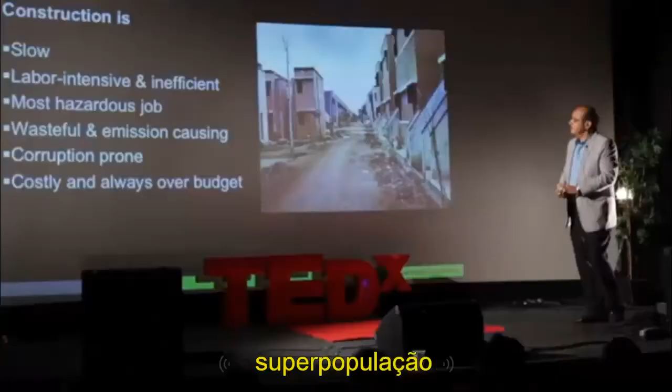illiteracy, and overpopulation. Naturally, governments are after a solution. They are after finding ways to change the situation. However, what they're facing is a problem of conventional construction, the current construction methods that we employ. They are generally slow, labor intensive, and inefficient.

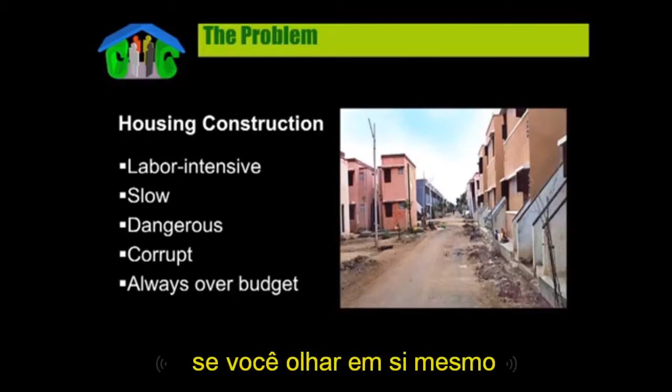If you look around yourself, pretty much everything is made automatically today. Your shoes, your clothes, your home appliances, your car. The only thing we still build by hand are these buildings.

Construction is the most hazardous job. It is more dangerous than mining and agriculture. In this country, it kills 10,000 people every year, and there are about 400,000 injuries every year. Eventually, these translate into cost to the society and homeowners.

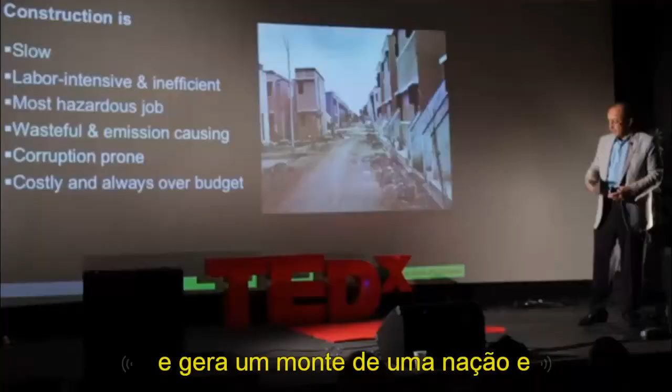Construction, the way it's done today, is very wasteful and generates a lot of emission. And because of all the different trades that are involved and the difficulty of the management process in construction, the process is pretty corruption prone. It is very costly and is always over budget.

So what we have been focusing on is finding a solution to this problem. And our solution basically benefits from advanced technology.

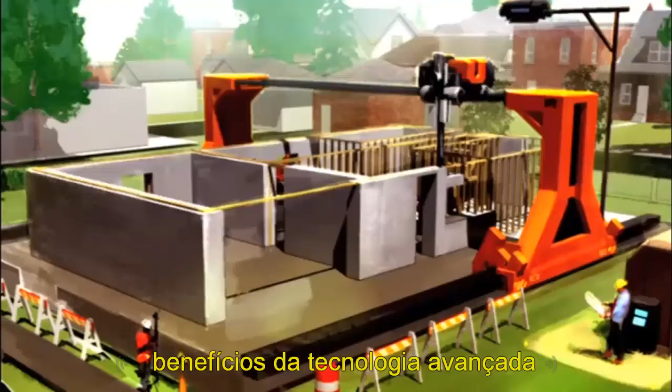I named this process contour crafting, and it is essentially a way of streamlining the process of construction by benefiting from the experience that we have gained in the domain of manufacturing. In manufacturing, there's a process called CAD/CAM, computer-aided design, computer-aided manufacturing.

A lot of things that you see are designed on computer and, without any human interference, are sent to the production machinery that automatically make those products that you use. So we want to scale up those processes and bring them to the realm of construction.

This, of course, has been the desire of a lot of engineers and technologists. There have been problems and difficulties in such a transition. Recently, there has been development in the field of fabrication. You probably heard about 3D printing of 3D objects. So contour crafting is basically scaling up 3D printing to the scale of buildings.

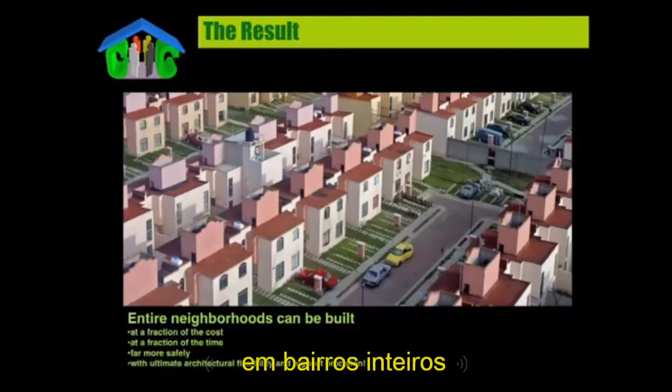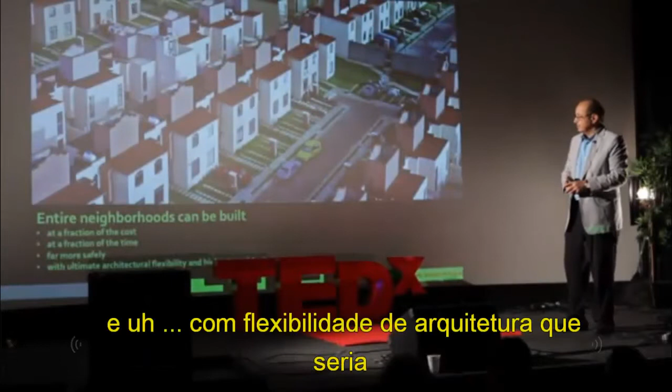What we are hoping to generate are entire neighborhoods that are dignified at a fraction of the cost, at a fraction of the time, far more safely, and with architectural flexibility that would be unprecedented.

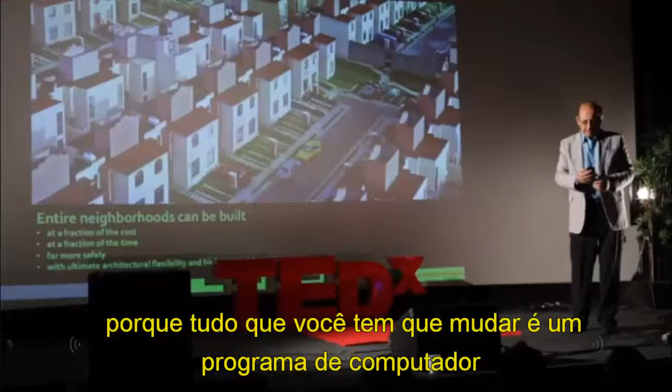So the buildings that will be built, of course, will not be as homogeneous as these. Every building can be very different. They do not have to look like tract houses because all you have to change is a computer program. The architectural design is basically sent to the machine directly.

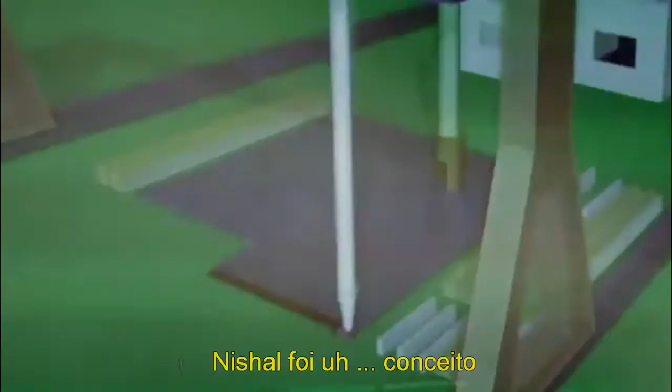This animation shows the concept. The material, which is cementitious material, initially concrete, is deposited through a nozzle, and the building is built layer by layer. In the process, a lot of things can be done, including automatic reinforcement, automatic plumbing, and automatic electrical network installation.

Once the basic structure is done, there could be other automated processes that would do auxiliary operations such as finish work, tiling, and even painting using inkjet printers, the kind that print billboards. So in the end, the whole building can be ready in an unprecedented time. We anticipate that an average house, like a 2,500 square foot house, can be built in about 20 hours, custom designed.

The model that you see here is pretty simplified because I didn't want to make the animation difficult for my students. But you can imagine that the walls do not have to necessarily be rectilinear. They can use any kind of curve. Therefore, you can really execute very exotic, beautiful architectural features without incurring additional cost.

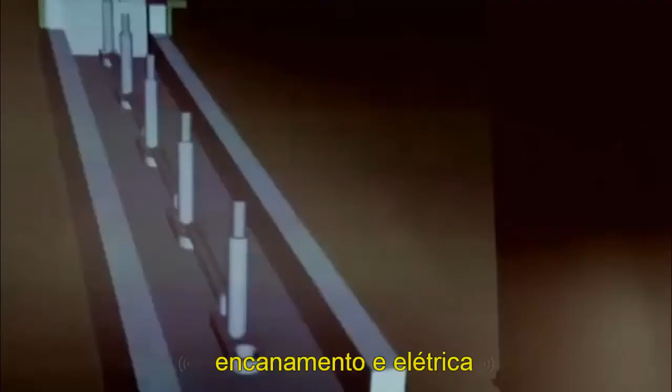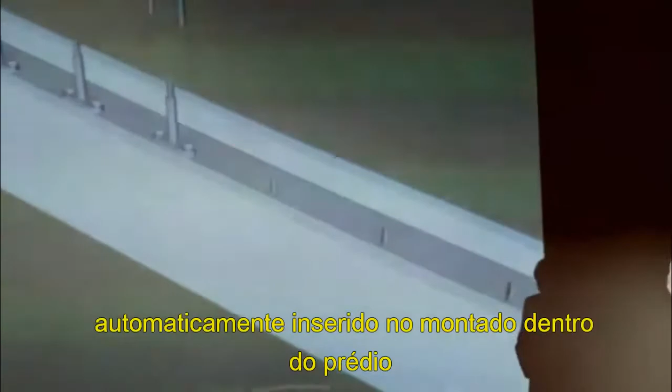These clips show how reinforcement, plumbing, and electrical installation can be done. So rather than using continuous rebars, we can have segments of rebar automatically inserted and assembled inside the building. This wall is being reinforced by a two-dimensional mesh of steel. Likewise, plumbing elements could be installed while the building is being erected.

As you know, currently every one of these activities involves its own trade. So for electrical network installations, you can have these polymeric blocks with conductors that carry electricity and communication signals.

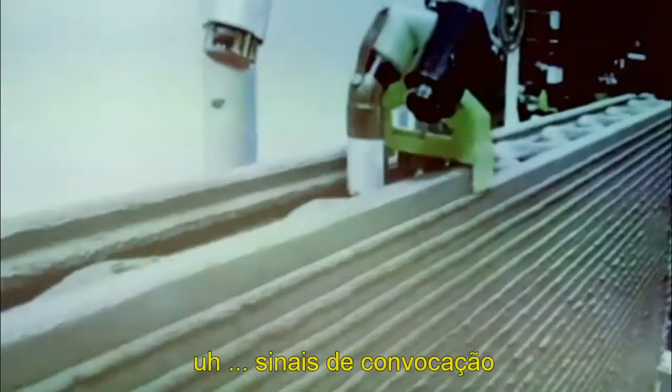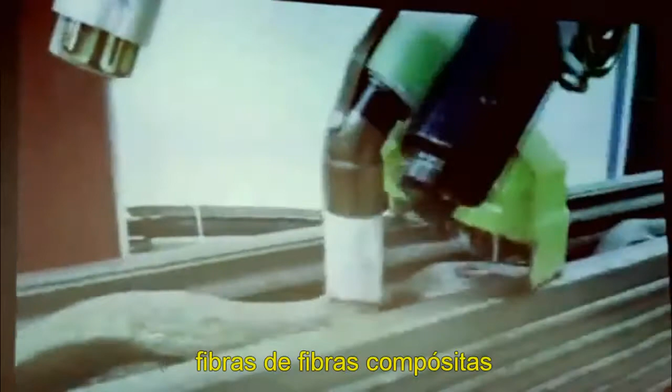Well, this is one of the machines that we've developed. As you see, the nozzle is extruding pretty dense concrete. This concrete is high performance, and it is mixed with fibers, composite fibers. It gives you a pretty good strength. This particular wall has a 10,000 psi strength. The average concrete structures that you see typically are about 3,000 psi, pounds per square inch.

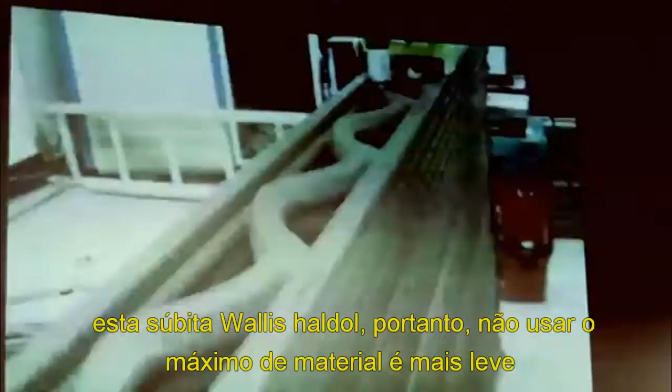This wall is hollow, therefore does not use as much material. It's lighter and has good heat insulation characteristics.

This is a typical machine that will be used for this technology. And this particular machine that you can see here can replace existing mobile homes. They refer to them as tornado magnets.

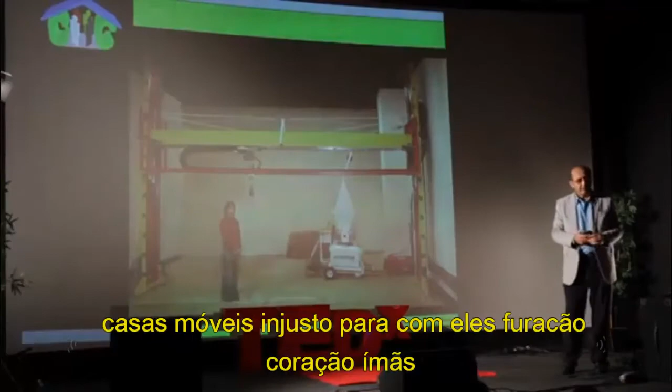You can have different kinds of configuration for these robots. This is like for a single detached residential building. You can have a multi-nozzle machine that will be good for large buildings. These nozzles work concurrently, or you can have the machine climb the building.

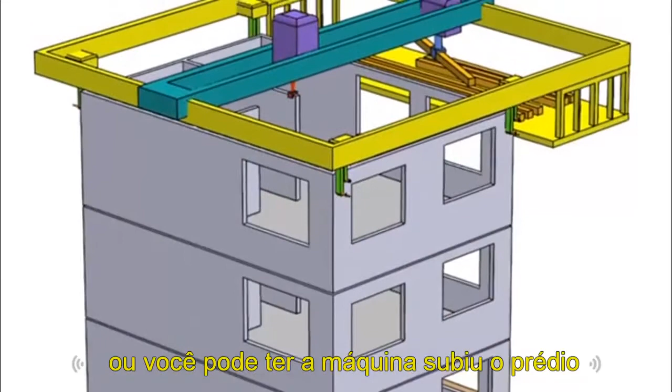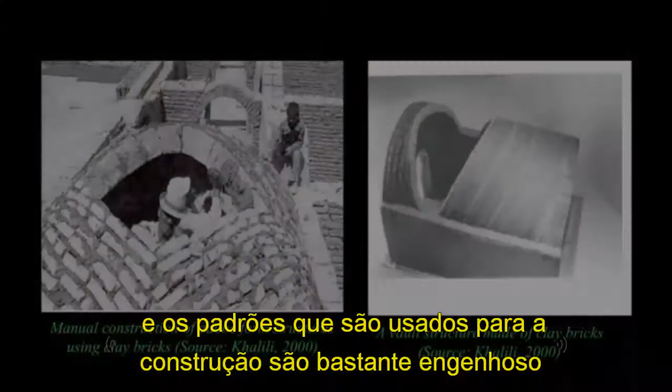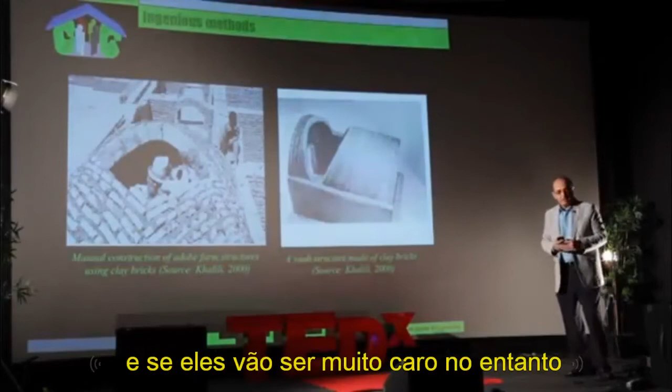Inside, these buildings can be pretty homey, organic. And the patterns that are used for building these are pretty ingenious. But those people are no longer accessible in a lot of places in the world. And if they are, they'll be very expensive. However, with robotic systems, we can mimic those patterns and build those beautiful structures automatically. And we can even use the in situ material to build structures without support beams.

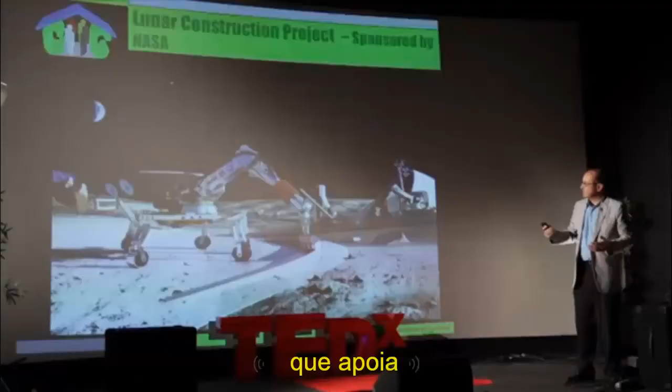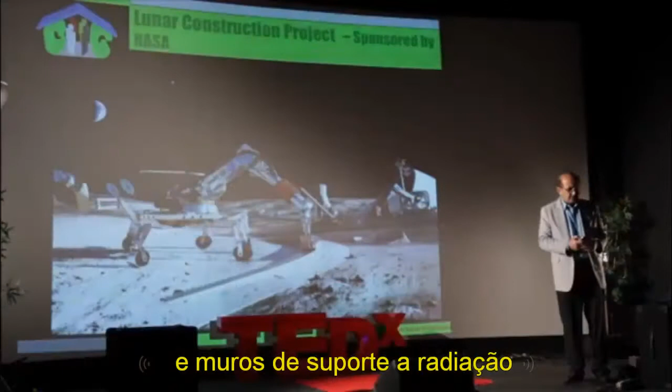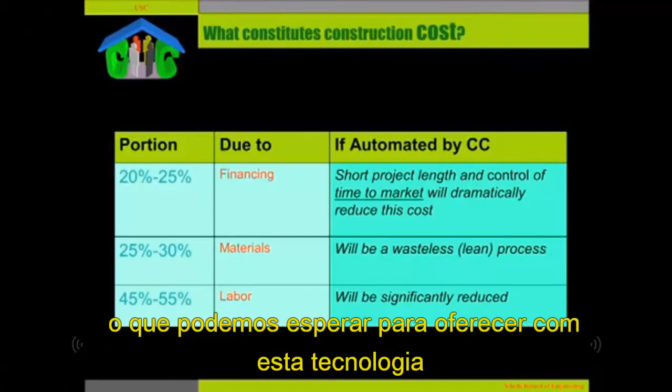So our current project that is supported by NASA aims at using the technology to build lunar structures such as landing pads, roads, hangars for the landers, support walls, radiation protection walls. So these are some of the structures that are built. This could be a lunar fuel vessel. What we expect to offer with this technology is significant reduction to the cost by reducing the cost of financing,

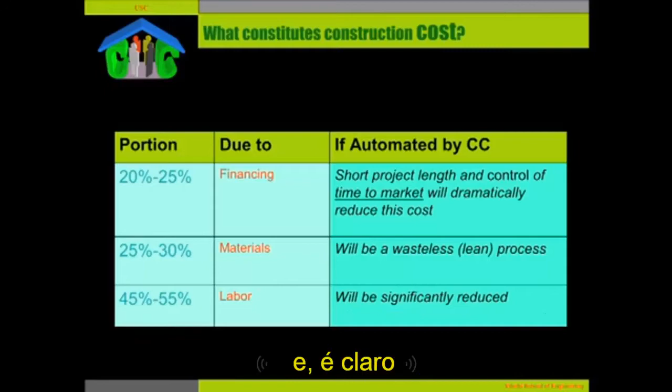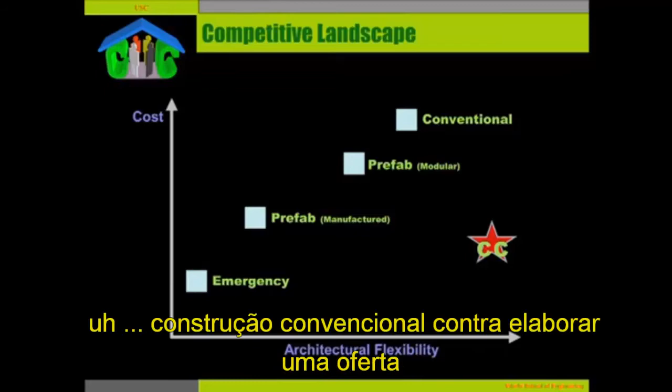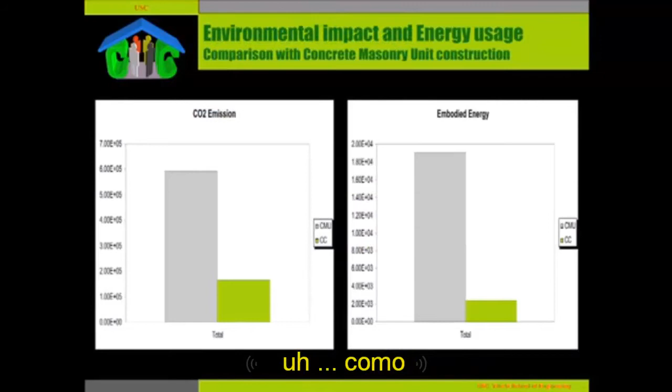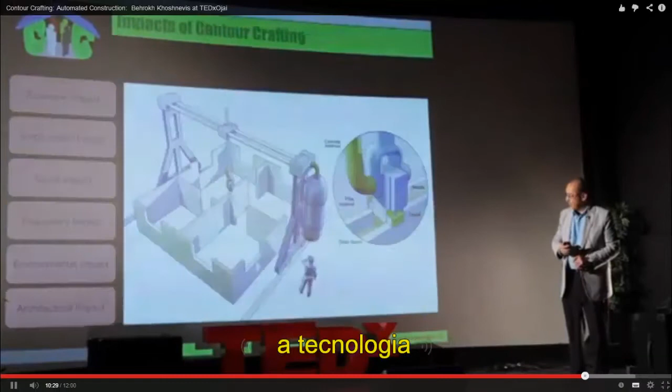the cost of materials, and of course, significantly reducing the cost of labor. Compared to emergency prefab modular, and conventional construction, contour crafting will offer the highest architectural flexibility with a cost that is only higher than emergency building construction today. And as far as construction speed is concerned, nothing will beat contour crafting. CO2 emission is a small fraction of the current emission, and the energy usage by the technology is also very low. So therefore, the technology is extremely environmental friendly.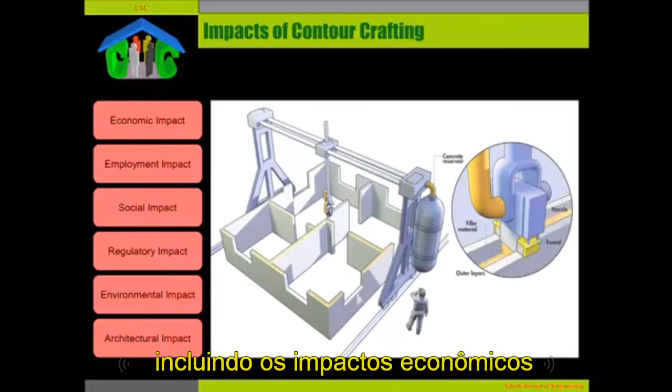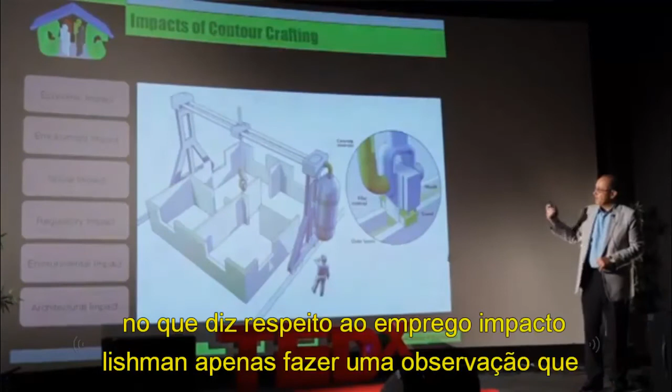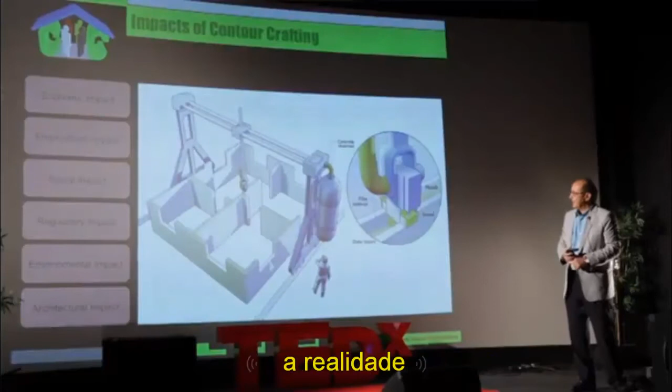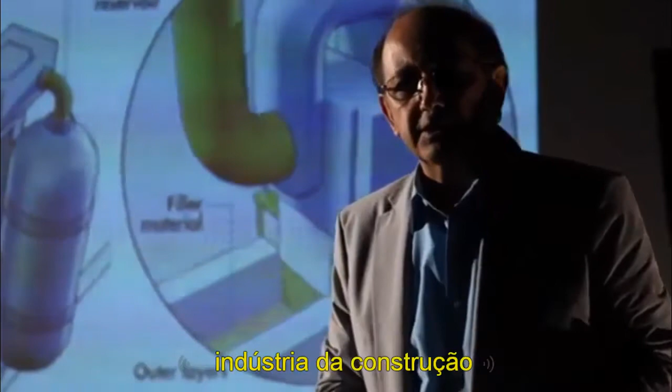Contour crafting as a disruptive technology will have a number of impacts, including economic impacts, employment impacts, social impacts, regulatory, environmental, and architectural impacts. With respect to employment impact, I should just make a remark that there is a lot of concern about people being put out of the construction job. The reality is that a lot of new jobs can be created in this sector as well. Currently, women and the elderly do not have much opportunity to work in the construction industry. With new technologies like contour crafting, those groups of people can also be employed in more creative activities of construction.

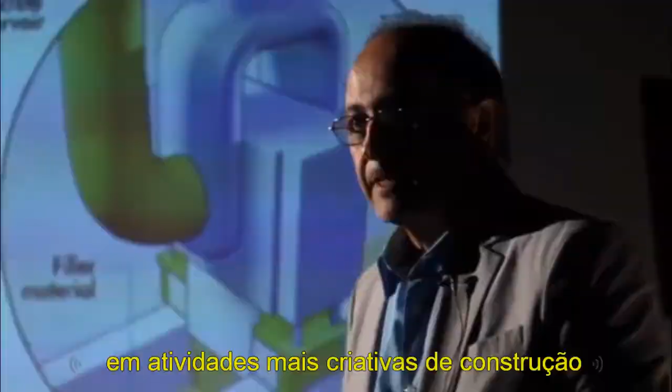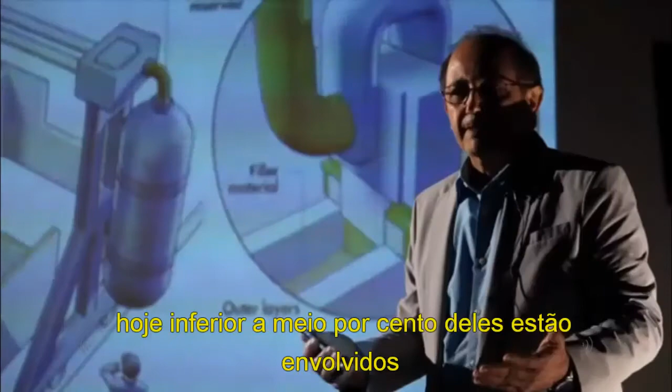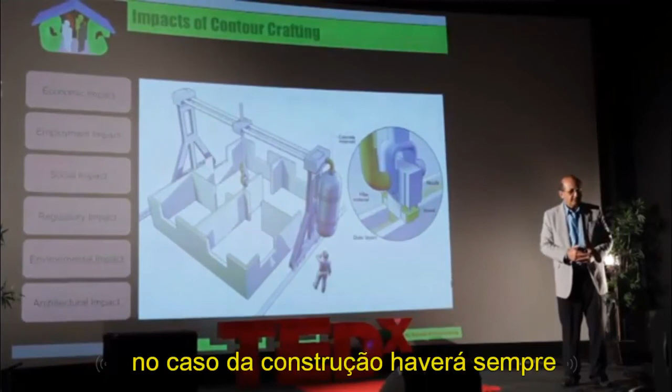At the beginning of the previous century, around 1900, 62% of Americans were farmers. Today, less than 0.5% of them are involved. The world did not come to an end as a result of utilization of agricultural technologies. And the same will be true in case of construction. There will always be better economies resulted from advancement and utilization of technologies that just make sense. Thank you.